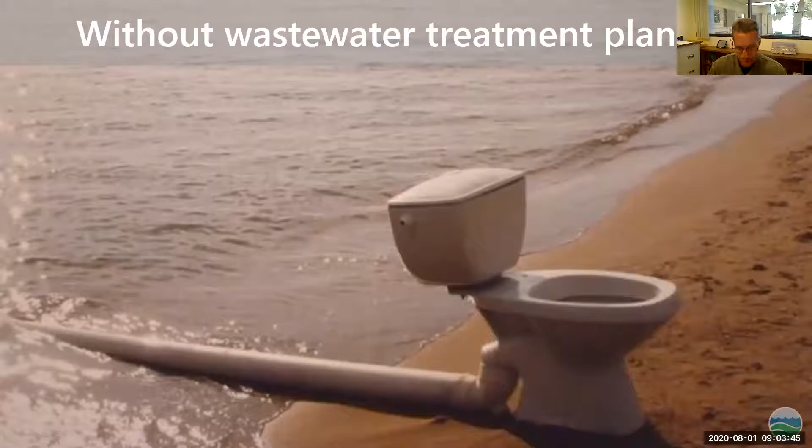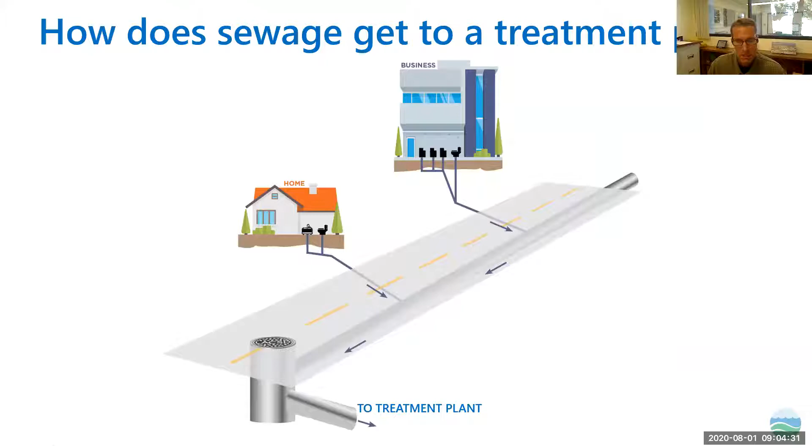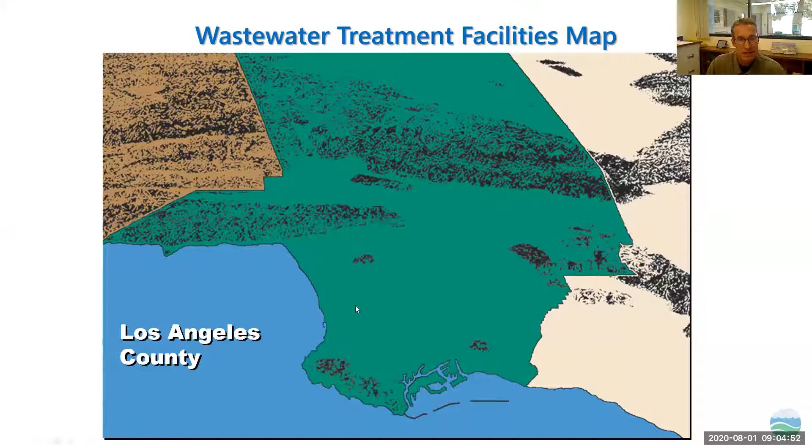This schematic shows the county - first we'll look at the City of LA system. Their Hyperion plant is equivalent in size to our Joint Water Pollution Control Plant, and you can see the outfall that goes out into the Santa Monica Bay. They also have three other water reclamation plants in their system.

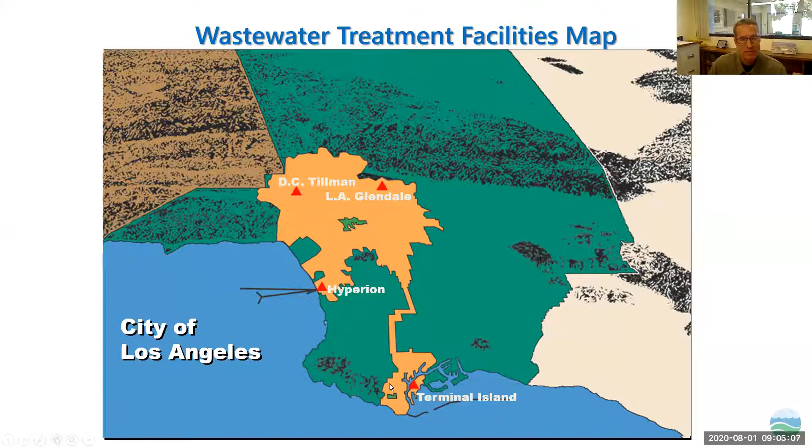But I'm going to talk about our system. You can see again the plants up in the high desert, Palmdale and Lancaster - they serve about 175,000 residents each, and their plants are treating about 12 million gallons per day. Over in the Santa Clarita Valley, you have Valencia and Saugus, serving another 250,000 people, with total flow for these plants about 20 million gallons per day.

I'm mainly going to talk about the joint outfall system here. It's a gravity system for the most part. As I said, we manage the large trunk sewers here, 1,400 miles, and we've got about 50 pump stations. That's these purple dots you can see. So it's a gravity system for flow, but anytime we get to a low point and have to pump it over a hill, that's where we have a pump station.

The other thing that's unique about this system is all the solids from these upstream plants get put back into the sewer downstream of the plant. So down here at the Joint Water Pollution Control Plant is where we're actually managing the solids for the whole system. So these upstream plants, we pretty much cherry pick the residential cleaner wastewater without any refineries or industrial dischargers.

And then we're able to reclaim that water through the process. We use primary treatment for a physical settling process, secondary treatment for a biological removal process, and then finally sand filters up there. And then the water can be reused for golf courses, parks, groundwater recharge, and things like that. The total flow for this joint outfall system is about 400 MGD, 400 million gallons a day.

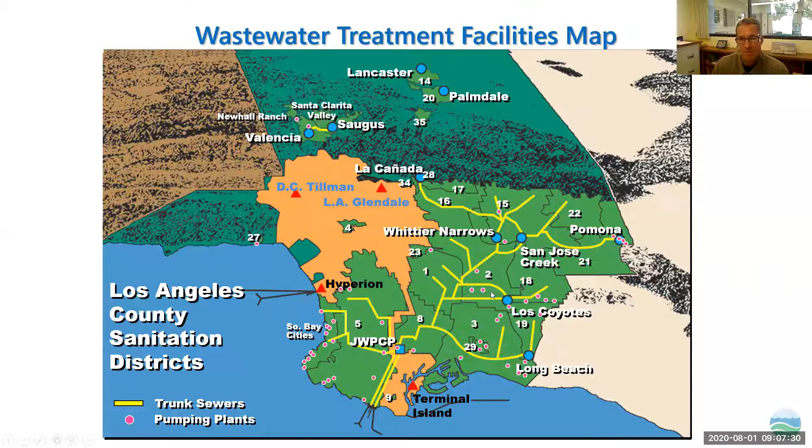As I said, the joint plant here handles the solids for the entire system. We also have an extensive industrial waste pretreatment program where we make sure industries take out heavy metals and any other toxic compounds or volatile organic compounds that might cause problems in our treatment process. Those are required of the industries to do the pretreatment before they discharge to our sewers.

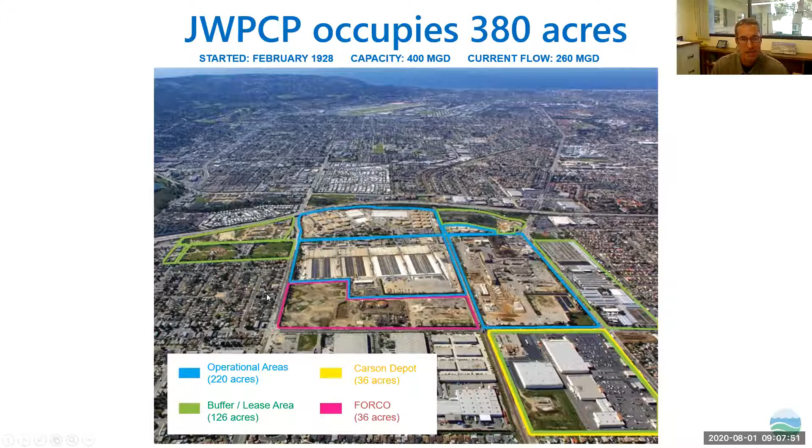So as I said earlier, the plant's been around since 1928, as you can see here. Capacity is 400 million gallons per day, and our flow is about 260. The operational area is about the blue area here, about 220 acres, and then we have another 160 acres of buffer property.

As far as the plant itself, this is our administration office where you come in and see us. You can see the roads and how to get here. We've got 4 main areas of the plant. The primary treatment is on the west side of Figueroa Street, and then also the digesters - those are the large circular tanks here.

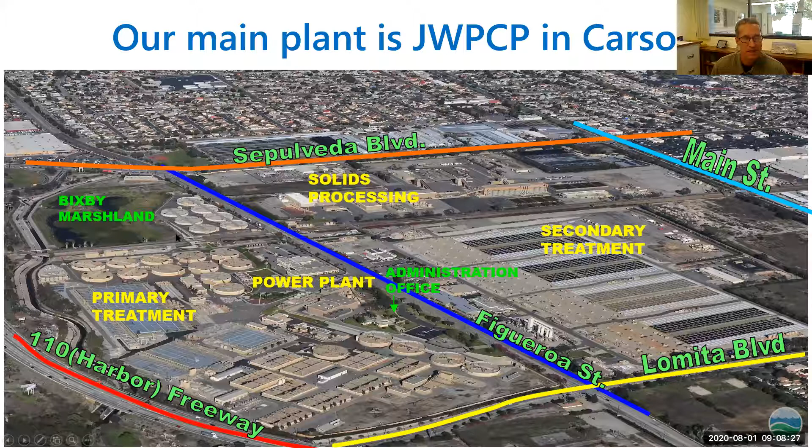Secondary treatment is on this side of the street, and solids processing is north of the railroad tracks. And then as Genesis mentioned earlier, we also have a little gem here, the Bixby Marshland, and Wendy will be talking about that after I finish talking about the plant.

These primary settling tanks, we're just duplicating nature, creating a large spot or a wide spot in the river, I guess you could call it, where we slow the water down from 3 feet per second to 3 feet per minute, and settle out about 75% of the solids.

From there, it goes to a secondary treatment process, and this is a biological process where we take out what we call dissolved organic material. The way you could think of that is like if you have a clear cup of water, and you dissolve some sugar in it - that's organic material and food. But once you pour that sugar in and dissolve it, when you look at that water, it's still clear and you can't see that food in there.

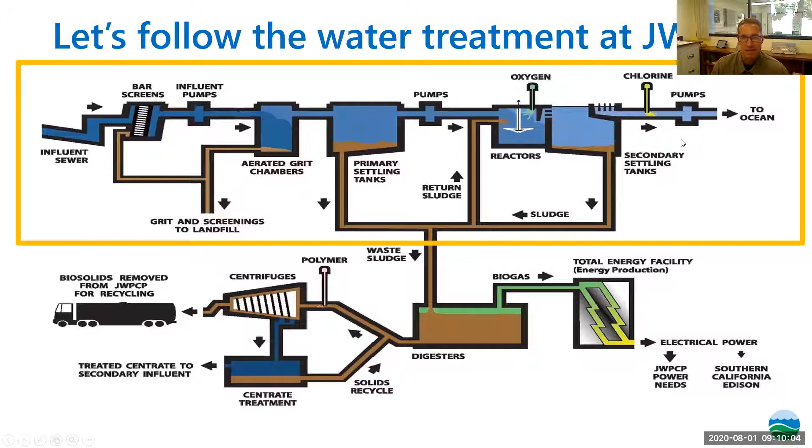And it's the same way with the wastewater. We've got a lot of dissolved organic material you can't see in there, but the bacteria love it - it's food. That's what this biological process does, and it's called activated sludge. So we use these covered reactors and then clarifiers, and the bacteria, the microorganisms, settle out, and then we return them around to the front of the reactors and keep recycling that activated sludge. From there, we go to disinfection, and then it can either pump or gravity flow out to the ocean.

So the first step is our preliminary treatment, where we have 3 main sewers coming into the plant, one for each of these 3 bar screens. You see 3 here with one sewer, 3 in the middle with another sewer, and then 3 on the right side with another sewer.

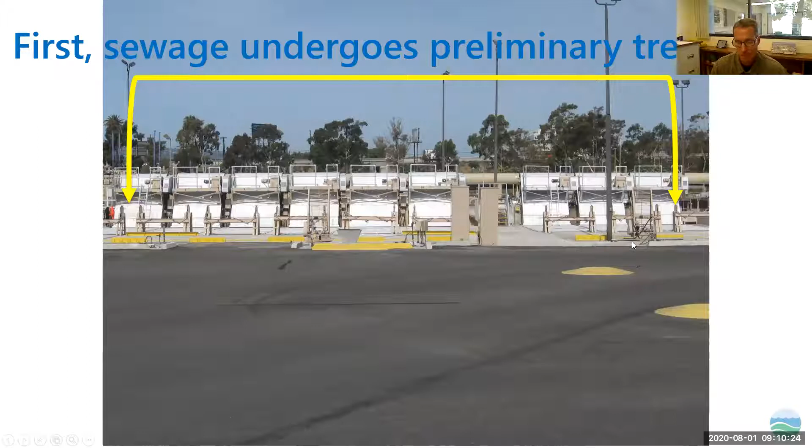These screens have about 1 inch of space between the bars. This takes out any large material that gets into the sewer that we don't want going downstream, anything that could damage downstream equipment. Basically, if you picture anything that could fit through a manhole lid, we've pretty much seen it here - rags, wood, large debris like mattresses.

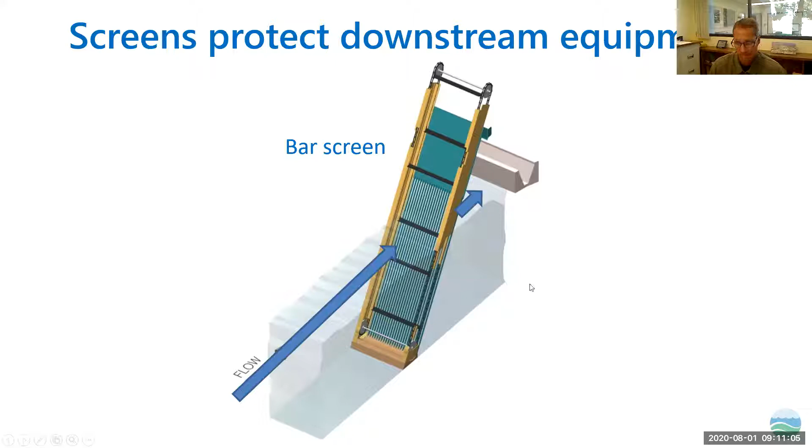There was even one year where we had a sewer collapse right under a nursery, and they had a sinkhole. Right in the middle of a rainstorm, a bunch of those 5-gallon and 15-gallon pails of plants fell into the sewer and flowed down, getting caught up on our rakes, and the operators were pulling those out.

So this is what these rakes look like. Here's a clean one after we did some maintenance on it, and this is what it looks like when it's been in service. Probably the biggest thing we take out is the rags, the disposable wipes. You can see the disposable wipes don't break up like toilet paper, so please don't flush the wipes, even if the box says flushable.

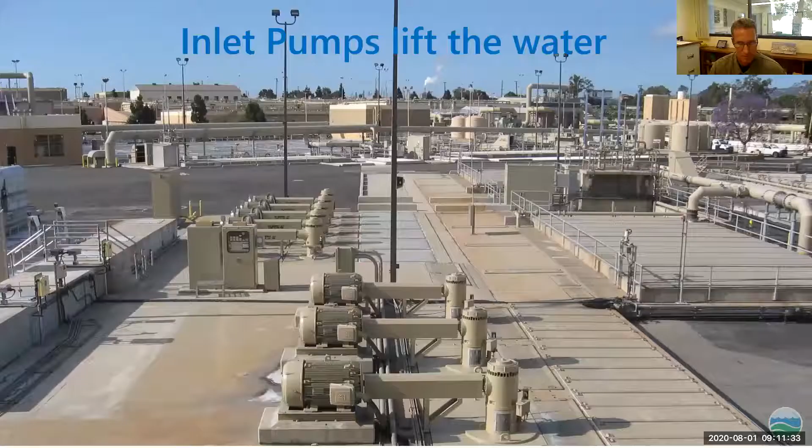Over here, you can see the screens on the left side. The water flows through, and since it's a gravity system, gravity flows to here. Underneath these gearboxes, we have vertical turbine pumps that lift the water into these channels. From these channels, it then gravity flows through primary treatment.

Before it gets into those primary sedimentation tanks, we have grit chambers here. The purpose of the grit chambers is to remove grit, sand, rocks, and other heavier inorganic material. We add air here to try and keep the lighter organic material in suspension.

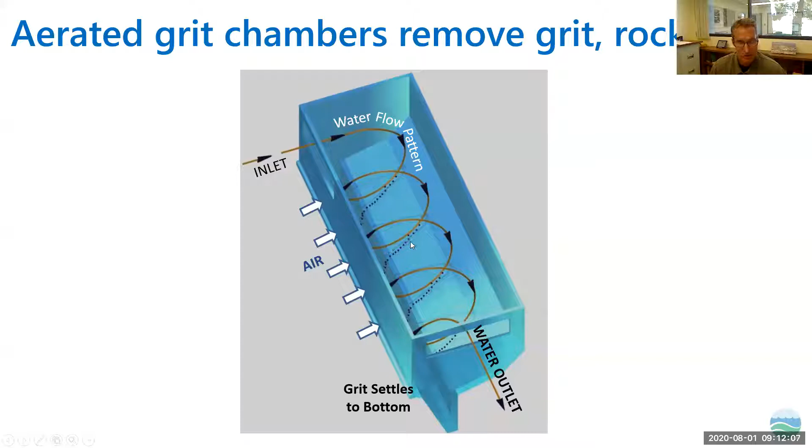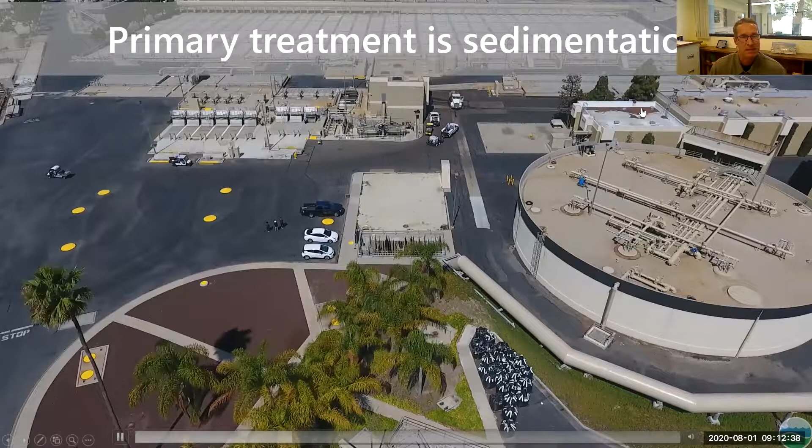So we head in here, you can see the cooling towers from the power plant on the left, and the digestion tank here. This is the inlet works that we just looked at with the bar screens, the inlet pumps, and the grit chambers in these covered tanks over here, our sedimentation, which is the main bulk of our primary treatment process.

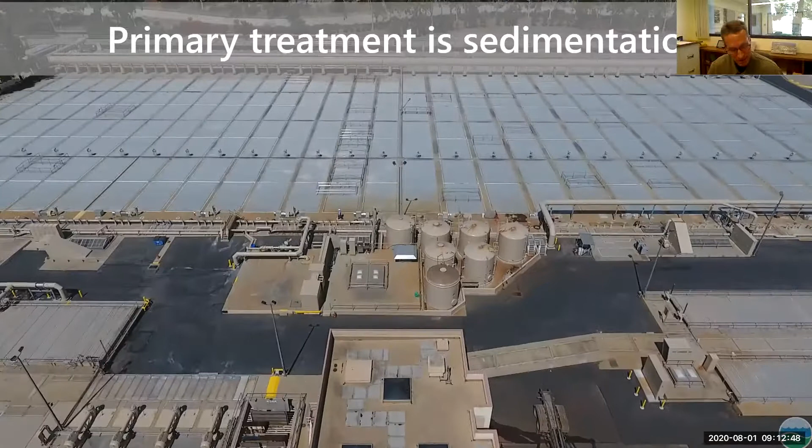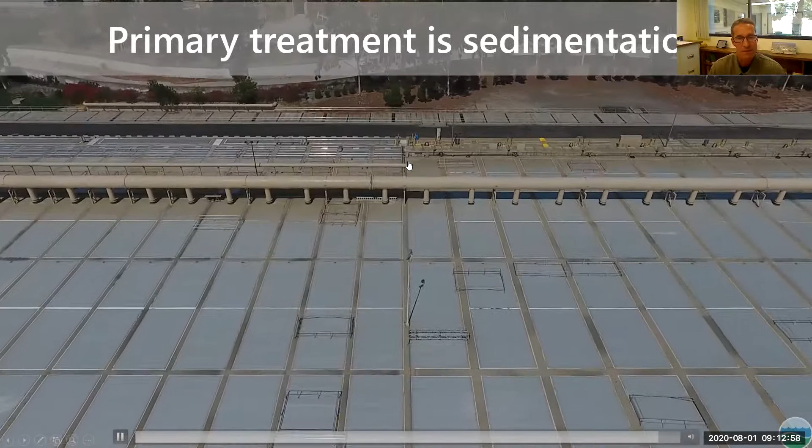As I said, it slows the water down to about 3 feet per minute, settles out about two-thirds to three-quarters of the suspended solids, and it takes about an hour and a half for the water to flow from one end of the tank to the other. From there, we pump this water across the street to secondary treatment.

If we were able to get out and look at a tank, this is what you would see. These tanks are about 10 feet deep, about 300 feet long. The solids that settle out in the bottom, we collect in a hopper and then pump to our digesters for further treatment. The material you see on top here is fats, oils, greases, and other floatable material we call skimmings. This flight moves along and skims that off, and then we also pump that to the digester to be further treated.

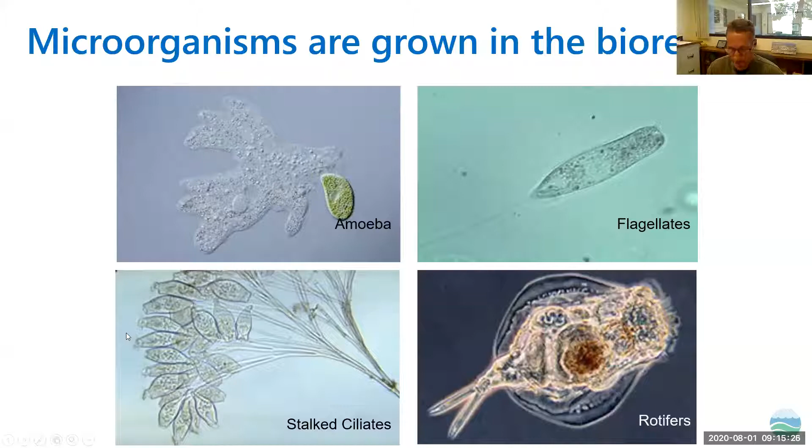This shows you, when I talk about the microorganisms, you can kind of see the various kinds here. These are the ones feeding on that dissolved organic material, or as I described earlier, that sugar.

I've got another video for you here. We're going to fly across the secondary reactor. So the oxygen is piped into the headspace. Underneath these gearboxes, we have surface aerators that do the oxygen transfer. They're just big propeller blades stirring up the surface and transferring the oxygen.

From there, the mixed liquor, the bacteria and water, flow into these tanks. The bacteria settle out and get recirculated back to the front of the plant, and the effluent moves on for further treatment.

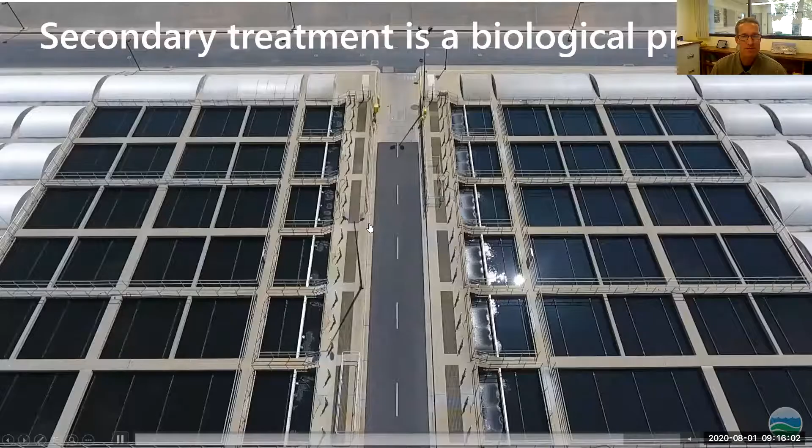Just in case you were wondering what the water looks like, this is the water coming into the plant. We call it the influent. About 3/4 of the solids and about half the dissolved organic material is removed in primary treatment, and then the remaining portion, virtually all of it, is removed in secondary treatment.

Here you can see the clean water we're sending out to the ocean. We disinfect this before it heads out, using 12.5% sodium hypochlorite, or bleach, which is more concentrated than household bleach at about 5% concentration. It's about another 4 hours out to the ocean, and the disinfection takes place there—by the time we reach the ocean, we have virtually no chlorine residual.

We have an 8-foot and a 12-foot tunnel that were installed back in the 30s and 50s. Those have been in continuous service for many years.

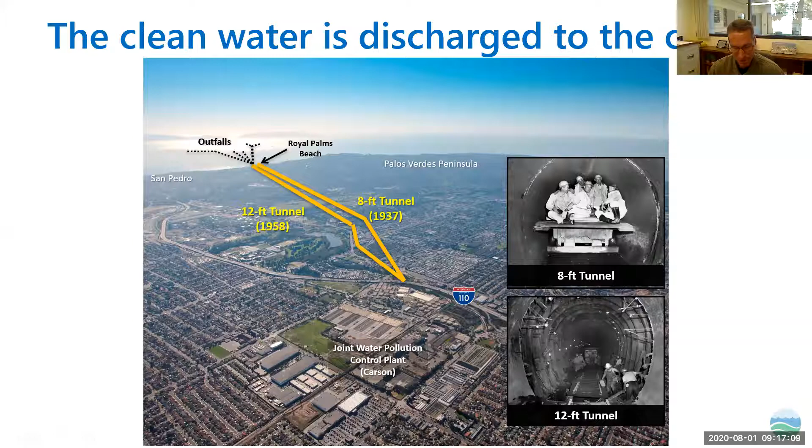Then you can see the outfall here. We have 2 outfalls that go right out to the edge of the continental shelf, a 90-inch and a 120-inch, that are normally in service. We also have 2 older outfalls closer to shore, used just for hydraulic relief during rainstorms and things like that. You can see the diffuser ports on the end here, and our target is 166:1 dilution out there. These are about 1.5 miles offshore, nearly 2 miles, and about 200 feet deep.

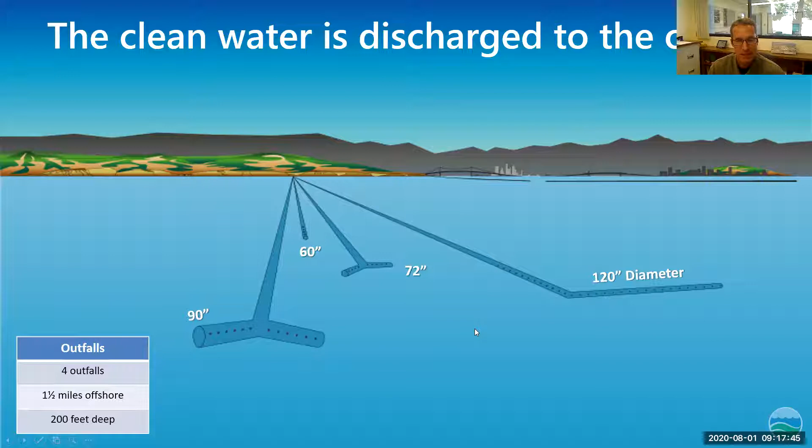We also have a very extensive marine biology ocean monitoring program here. You can see our marine biologists out on the boat. They take all sorts of samples of the water at various depths of the water column, catch fish, look at the fish and other sea animals, and take samples of the sediments to look at the benthic organisms, to make sure we're not having any negative impact on the environment with our discharge.

As I said, the existing tunnels have been in service for many years. So we have this thing called the Clearwater Project, where we looked at the reliability of the system moving into the future. One thing identified was that we had a single point of failure with these tunnels and needed more reliability moving forward. Ultimately, the decision was made to build a new tunnel here.

You can see the serpentine path—we tried to keep it under the public right-of-ways, under the streets, and also routed it so it went perpendicular across any earthquake faults. The design also uses innovative technology perfected out in Japan, where flexible joints are used around the earthquake faults to help with stability in case of an earthquake.

The plan is that once this new tunnel is in service, the 2 existing tunnels would be taken out of service, repaired and refurbished, and then we'd have plenty of sufficient redundancy there.

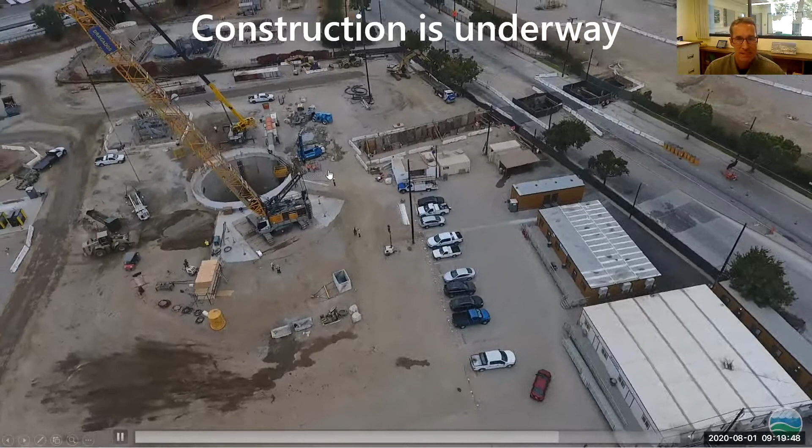And here you can see a tunnel boring machine. These are very sophisticated machines, a couple stories tall. It's currently being built over in Germany and tested, then it'll be disassembled and shipped over to the US and trucked to the site, then lowered down through that access shaft and put together down in the ground, and then we'll tunnel the 6 to 7 miles out to the ocean.

Okay, Genesis, we're at another break point here. Do you have any questions? Yeah, I have actually a few questions that came up.

So, how many people are working at the Carson site and at the sanitation districts as a whole? For the treatment plant itself, we have about 300 people that work on site here, spread around maintenance and construction, mechanics, electrical and instrumentation, laboratory operators, engineering and administrative staff.

Great, and the next question is, how does heavy rain affect the plant capacity? Good question. We do see a significant increase in flow during rain events, and that's due to a couple of reasons. You've got inflow and infiltration through the soil, the soil gets saturated, and if there's any leaking joints in those 1,400 miles of pipes. But what happens a lot of times too is there's street flooding, the storm drain system gets overwhelmed, and when the street public works departments are out trying to drain the streets, they start popping manhole lids on the storm drains, but a lot of times they lift our manhole lids and stormwater flows into our system too. So during a rain event, we'll actually see that 260 MGD average flow could even double or get up around 550, 600 MGD at peak rainfall infiltration events, and have an average daily flow of over 400 MGD, which is right around our plant capacity.

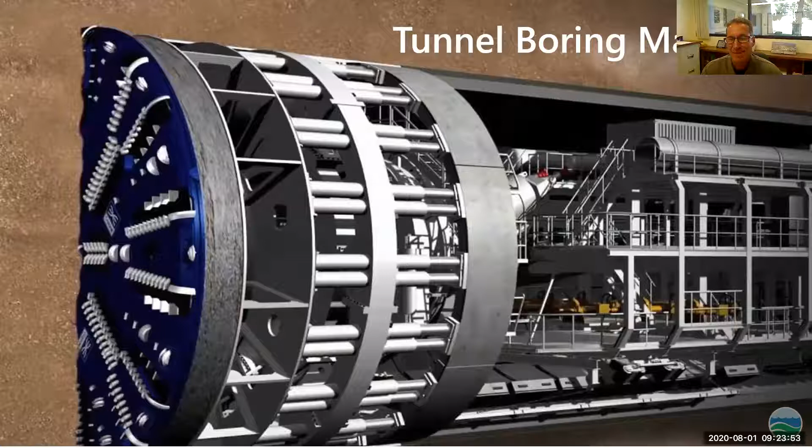What the question refers to is, when we put oxygen in underneath the headspace in that covered reactor, those bacteria, when they break down the organic material, one of the byproducts is carbon dioxide. Just like us, we're aerobic organisms. When we breathe, we breathe out carbon dioxide. It's the same way with the microorganisms. They give off carbon dioxide that causes the water to become slightly acidic. The pH drops from 7, which is neutral, down to about 6.3, 6.4.

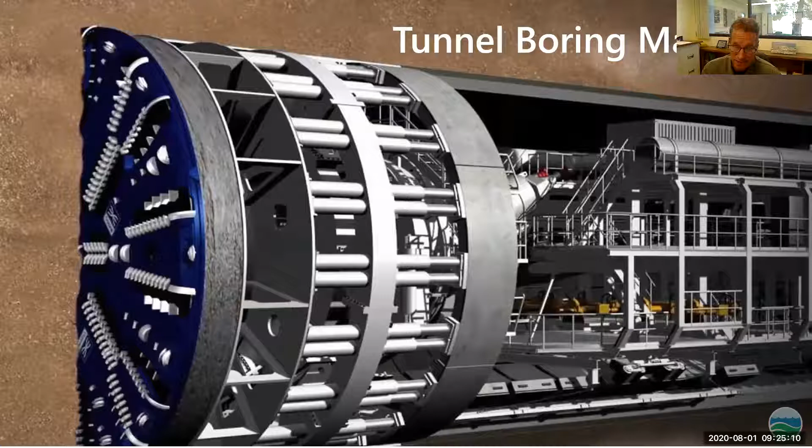So the reason we have this stripper to strip off that CO2 is because with the low pH, if we reuse that water, it's very corrosive. So in the 4th stage of our biological reactors, we pipe air in, which is 21% oxygen, and it has virtually no CO2 in it. So the CO2 that's in solution, concentrated, wants to become in equilibrium with the air that's blowing across at 21% oxygen. So it basically causes the CO2 to come out of solution into the ambient air that we're blowing through the 4th stage there. So it's called the stripper, that's where the name comes from, CO2 stripper for the 4th stage.

Is it okay if I continue on, or did you have another one come in? Just one more, about the tunneling, well, it's a few actually in one. When will the tunneling start? Will residents be able to hear it, and how long will it last?

The tunnel boring machine will be delivered and installed in early 2021, and then they'll tunnel out to the White Point area, where there are some connections to make and modifications to our manifold structure. That work will take about 3 years to complete.

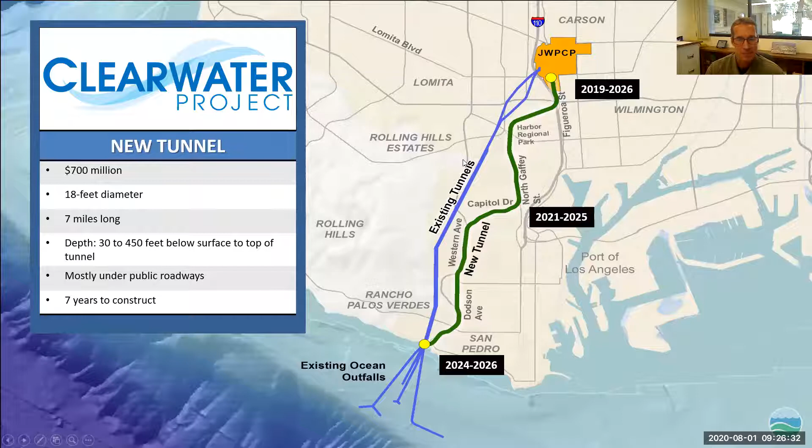Along Figueroa Street, on the right side of your screen which you can't see here, if you drive by you'll see a large noise wall that's a barrier for the work taking place. That work already started last year, so hopefully impacts on the local community will be minimized.

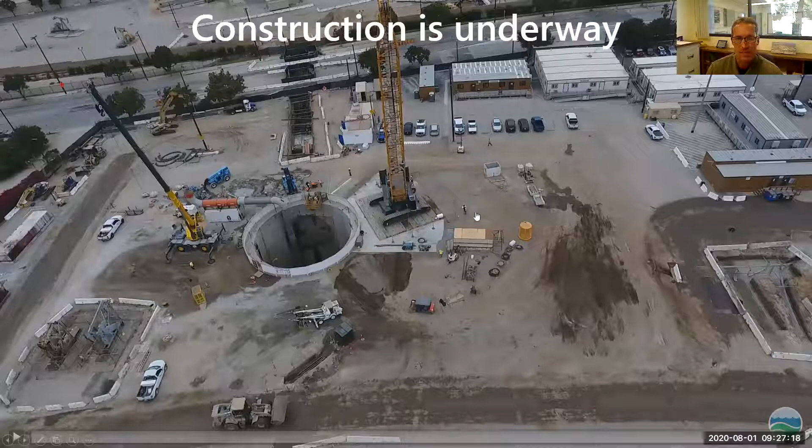There's also a number out there. I don't have it on my presentation, but whoever asked that question, we can get you the number to call with any concerns or issues, and we can put you in touch with the field engineer on the job for more detailed answers.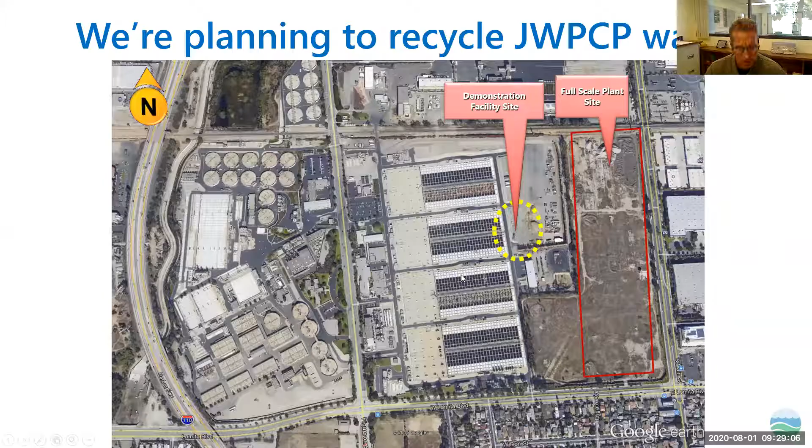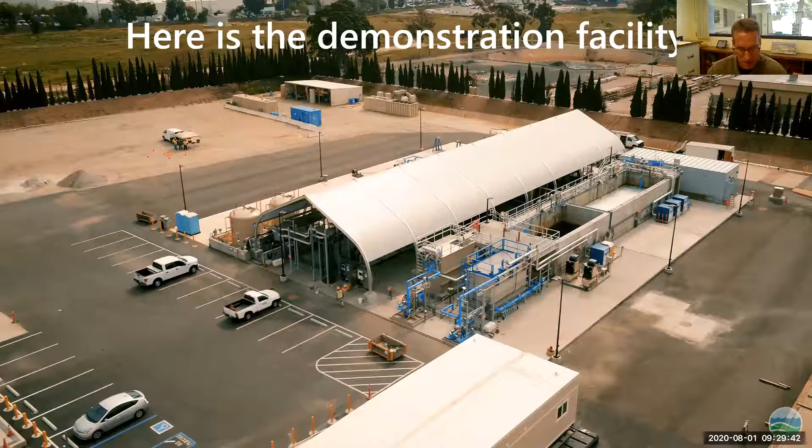There's a finite amount of water on the planet, especially in Southern California, so it makes sense to recycle and reuse as much as we can. We can probably reuse up to 150 million gallons per day from our plant.

Where would this water go? There are various sources or locations - the saltwater barrier injection wells in the South Bay and in the Long Beach area, and spreading basins in Orange County, Rio Hondo, and Santa Fe, where the water can be spread and percolate down into the groundwater for drinking water.

The water produced from our facility would be clean enough that it could actually go to the Diemer plant or the Weymouth plant, the MWD's drinking water plants, directly on the front end to be treated and then used as drinking water.

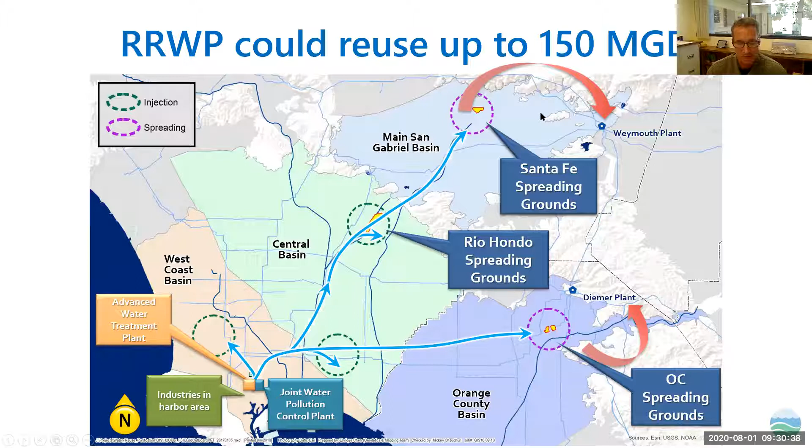How often do you check to see if the under-ocean pipes are leaking?

That's a great question. We actually check throughout the year. Once a year we have a submersible vehicle called an ROV, remote operated vehicle, that marine biologists use to go down with this little sub with a camera, and they'll go along the route of the outfalls checking for leaks or abnormalities, or if anything was damaged during a storm event. All our marine biologists are also trained divers, so they dive down to the more shallow sections of the outfall to do inspections and inspect the sea life, looking for any abnormalities or anything out of the ordinary.

So our next question is, why does the clean water flow into the ocean? Why not into the rivers?

Well, for the water reclamation plants upstream, they actually do flow into the rivers and eventually make it out to the ocean. Where we're at, our Wilmington drain, the storm channel right next to us, flows into Machado Lake. Because of the ammonia and salt concentration in our effluent, that wouldn't be good for the lake, so we go out to the ocean, and there's already a lot of ammonia and salt in the ocean. So what we're adding is kind of a drop in the bucket, and there's no negative impact from us going to the ocean.

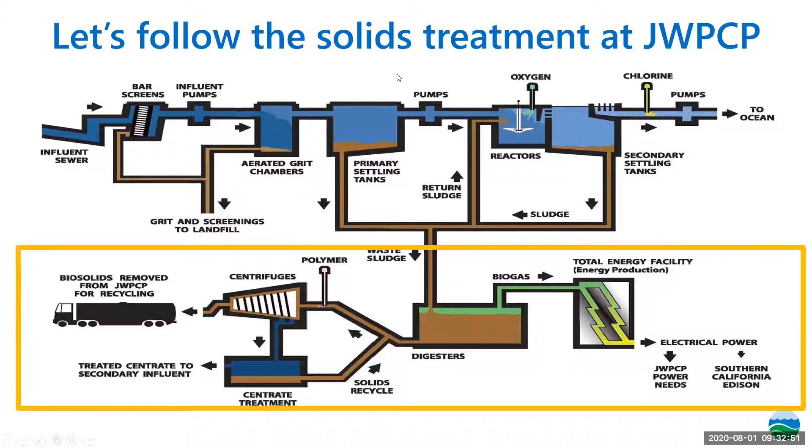Now the majority of questions, everyone wants to know about the solids. What happens to the solids? So Steve, I'll let you continue on to that next chapter. That's a great segue here. Yeah, it's perfect, I saved it for last.

So the first part we went through, we looked at the blue portion here through the water of the plant. Now we're going to look at the solids treatment. We've got solids that settle out in primary treatment and get pumped to digesters, and those microorganisms, just like us when we eat, put on weight. Same thing with these microorganisms - they're feeding on all that dissolved organic material. So we recycle a constant quantity, but any growth we waste out, and we call it waste activated sludge.

And we send that to the digesters. These are anaerobic digesters, the same bacteria that's in your stomach and your gut. We use these digesters - they give off gas, and the gas we collect and run through a power plant. The digested sludge then goes to centrifuges for dewatering, and then is hauled off site for recycling. I will go through each of these steps on the following slides.

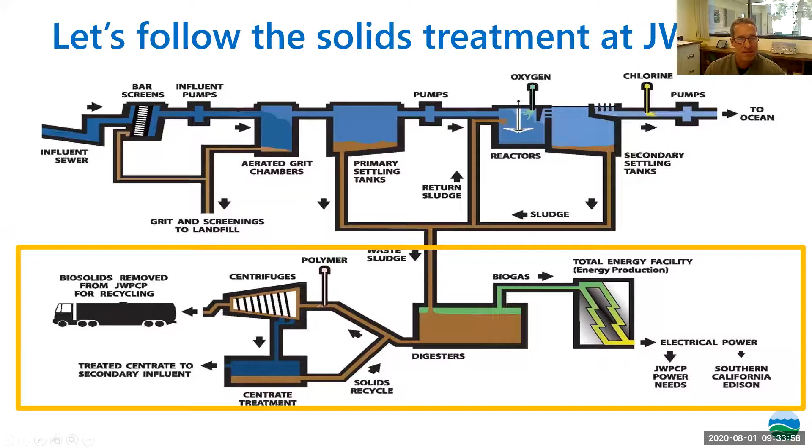So as I mentioned, anaerobic digestion is the centerpiece of this solids treatment. These are huge tanks, 3.5 million gallon tanks. There's about 10 feet above ground, and another 30 or 40 feet below ground. We've got 24 of these, so think of that as 24 tummies that we have on site treating these solids. About 50% of the solids are broken down by the bacteria in these digesters.

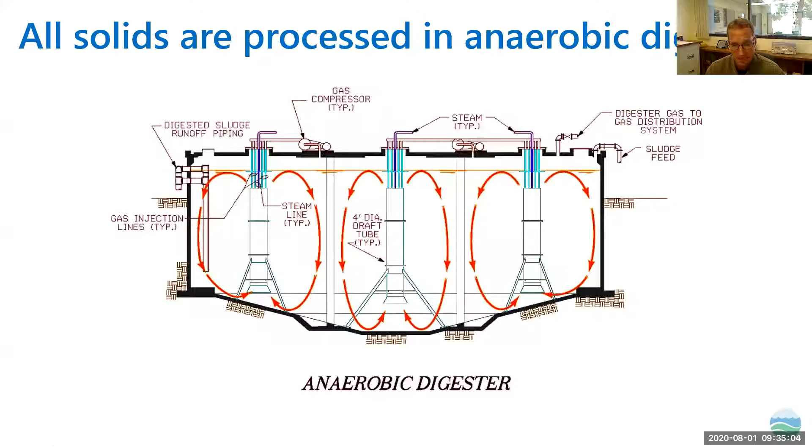We're able to look at a cross section - this is what you would see. The gas that comes off in the headspace is pulled off with these compressors, and then these lances blow the gas back down to about here in these draft tubes. There's no moving parts in there - it's all static mixing, so the gas bubbles come up and create a current and create the mixing. The advantage of digestion is it kills pathogens, makes the solids easier to dewater, and produces a gas we can beneficially reuse.

If we were able to take you inside one, this is what it would look like. Just to give you a feel for the size, if you see this board over here, this is about an 8-foot long board, so a 6-foot person would be about that tall there. As I said, these are 50 feet deep and 125-foot diameter, 3.5 million gallons. We have so many because we need at least a 15-day minimum detention time to properly treat the solids.

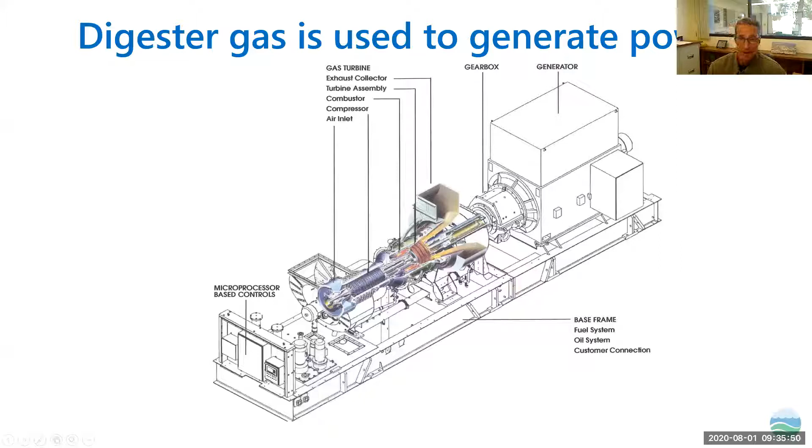The digester gas we use to produce power - we're energy self-sufficient at this plant. We use gas turbine technology, like a jet engine. We use digester gas as the fuel. It goes through a combustor section, through a turbine, and that turbine spins a gearbox connected to a generator and produces the power. This is what it would look like if we could take you in to see it. We've got 3 gas turbines producing about 9.5 megawatts each, and we save $15 million a year by taking that gas and recycling it to produce our own power.

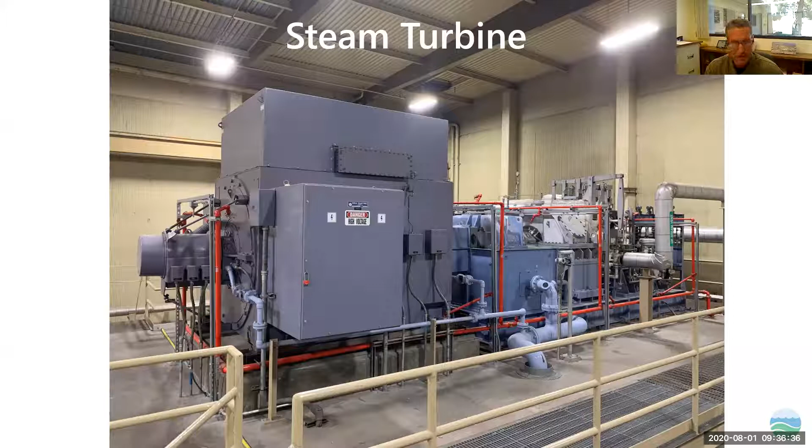Another innovative thing we do here at the plant is the hot exhaust. Rather than just coming out this stack, we have these heat exchangers, and we run the hot exhaust through that. The heat exchangers are filled with water, and that boils off the water to produce steam. That steam is then collected and run through a steam turbine to produce another 4 or 5 megawatts of power. That's why our plant is commonly called the combined cycle power plant, because there's a gas cycle and a steam cycle.

We also, as I mentioned, the digesters use the same bacteria as in our stomach, and the wastewater comes in at 75, 80 degrees. These digesters need to be heated up to 96 degrees, so we use boilers to produce low pressure steam. We use the digester gas as fuel to produce the steam, and that steam is piped to the digesters to heat them.

Another thing we're doing at this plant, which we started up 3 or 4 years ago, is getting more energy by taking in food waste into our anaerobic digesters. There are new state laws that say you have to remove food waste from landfills, because it's a resource with a lot of energy value.

So we had a demonstration project with Waste Management where they took food waste, pre-processed it off-site, sent it to our digesters, and produced digester gas. As I said, we can use that gas to make steam and electricity.

Biomethane is when you take the gas and clean it up to natural gas pipeline quality and re-inject it in the pipeline. We're not doing that here, but some other plants in the country are. The digester gas has about 65% methane, and you have to concentrate it to put it in the pipeline. We actually have a vehicle fueling facility on site for CNG, which doesn't have to be cleaned quite as much as pipeline quality, so we have a project with a cleanup skid to take our digester gas and use it for vehicle fuel.

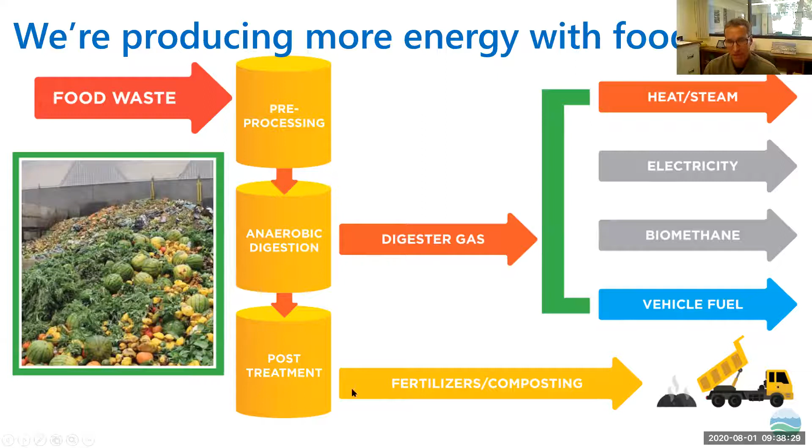About 80% of the solids from the food waste are converted into gas. The other 20% are hauled off site for composting and recycled as fertilizer on farms.

This shows you what the food waste looks like. Oh, I forgot to mention, a lot of the residential food waste we already get comes in through garbage disposals and through the sewers to us. So when we talk about a food waste program, we're mainly talking about commercial food processors, grocery stores with a lot of spoiled food, restaurants, and grease traps from restaurants, things like that.

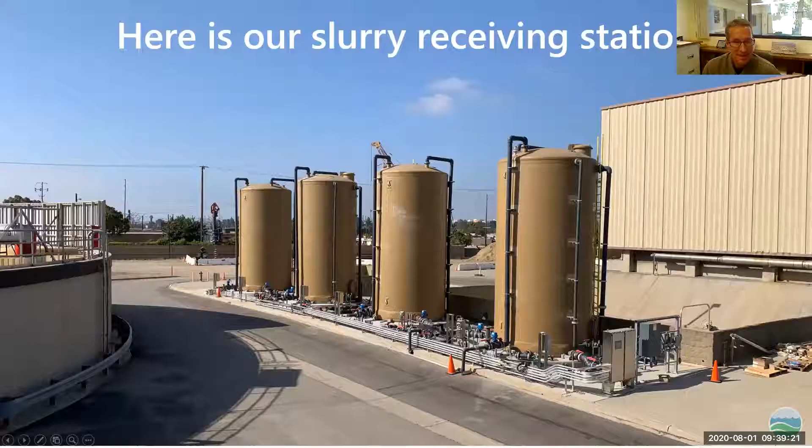So you bring that in, and it's got a lot of contaminants in it. You can see utensils and metal that have to be screened out. They use screens to take out the plastics, broken glass, and any other debris. Then you're left with this food waste smoothie, which we haul in tanker trucks, offload into these tanks, and then pump across the street to the digester.

We also take some food waste at the front of the plant that flows through the treatment process and gets pumped to the digesters through the primary treatment sludge.

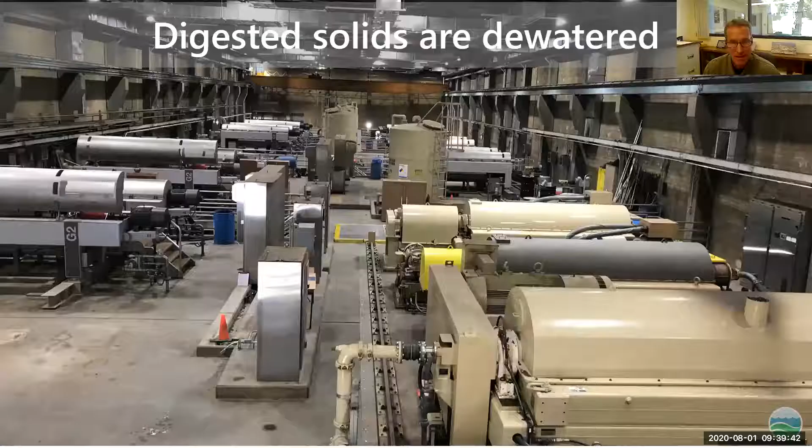Okay, I guess that's another break, Genesis. Any more questions before we move more into solids here? Could you raise your voice just a little bit? Oh sure, I think some people are having trouble hearing you. Okay.

So the next question is, how often do you do maintenance or overhaul on this? Well, as far as the plant itself, we've got quite a few people who work here - technicians, maintenance, construction, and mechanics - and we have a very extensive preventive maintenance program, which is basically what they do day in and day out on the various pieces of equipment and electrical switchgear, to make sure everything keeps running, because we run 24 hours a day, 7 days a week, so we can never shut down. Part of what we do is design in enough redundancy so we can take pieces of equipment out of service for maintenance without impacting the treatment process at all.

So our next question is, what do you do with all the plastics that come in with the food waste? Well, as I mentioned, in the pre-processing we try to take out as much plastic as possible, but some does get by the screens. In those digesters, we actually have to take them out of service about every 8 or 9 years for cleaning. We have 24 digesters, so there's always one out of service being cleaned at any given time. That's to clean out any grit, sand, or rocks that settle at the bottom, as well as any plastic or floatable material that builds up in a mat on top of the digester. We clean all that out about every 8 or 9 years.

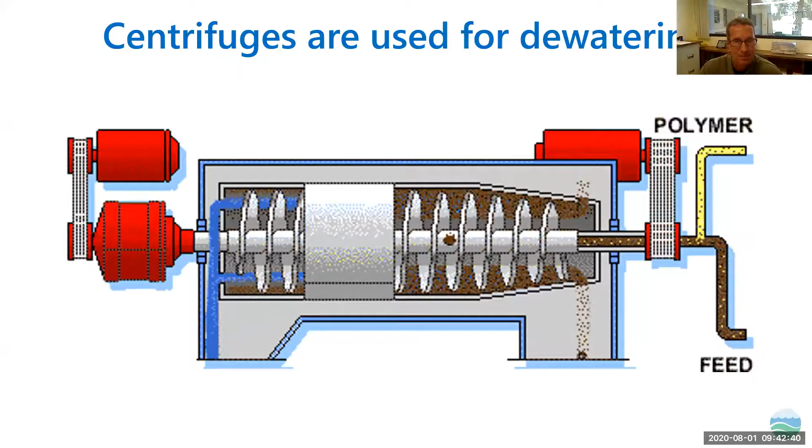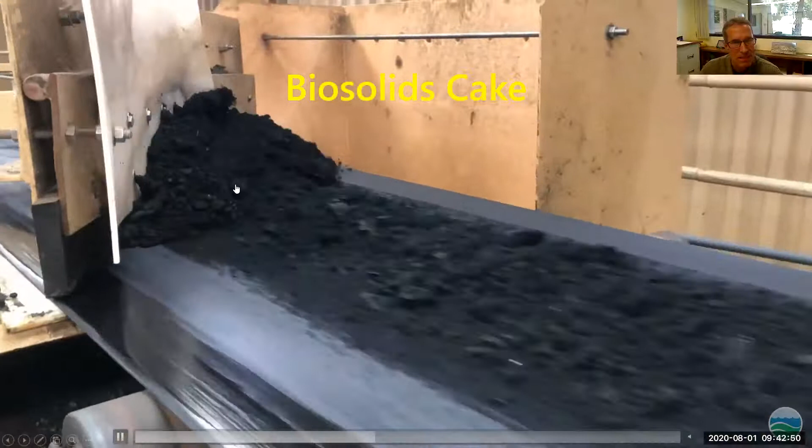Here you can see the solids. We use conveyor belts to move the material around. It's called cake because, as you can see, it looks like moist chocolate cake. Surprisingly, even though this looks pretty dry, it's about 70% water still, so there's a lot of moisture left in that.

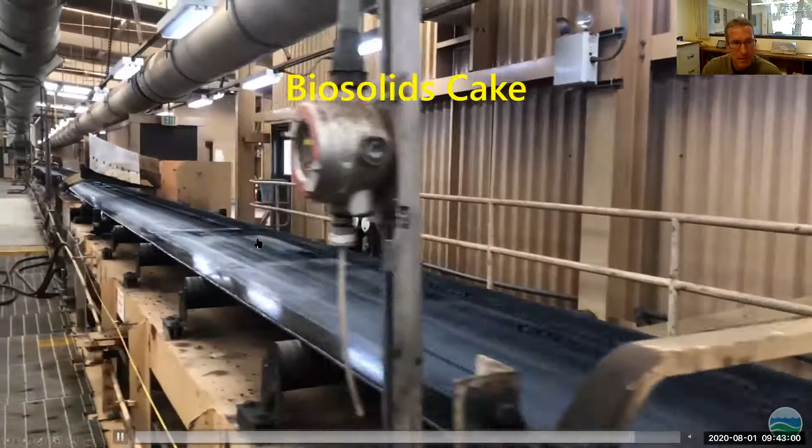These inclined sections here, this is where the conveyor belt went up. That video we took was right on top of the silos there. Those are storage silos where we can store the biosolids if we have problems hauling things offsite. If due to weather or earthquake or something a freeway is closed and we can't get to a reuse site, we do have some storage capacity on site.

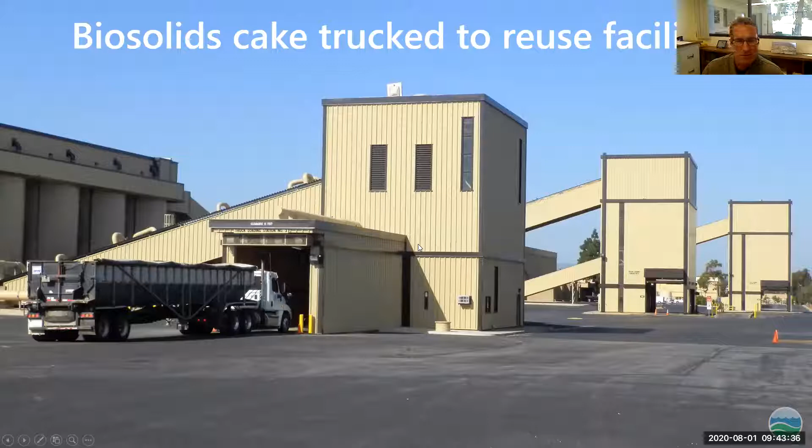From the silos, there's a conveyor belt that takes it up to the truck loading station, and then we load the trucks. We're producing about 1,200 wet tons per day of material, so about 50 trucks a day hauling material out of this site.

Denali, we haul some of the biosolids out to Arizona for land application out there. Then Tulare Lake Compost and Inland Empire are owned by the districts. Inland Empire Composting Facility is a joint venture between Inland Empire Utilities Agency and the districts, and that's owned and operated by us. Tulare Lake Compost is fully owned by the district.

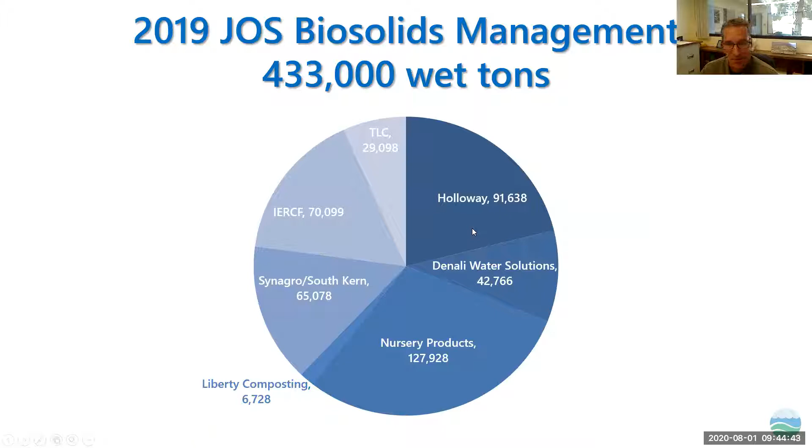Here you can see the diversification. We try to spread things out, so if we have a problem at any one location for whatever reason, we don't have all our eggs in one basket. We have to, because obviously 50 trucks a day have to go somewhere.

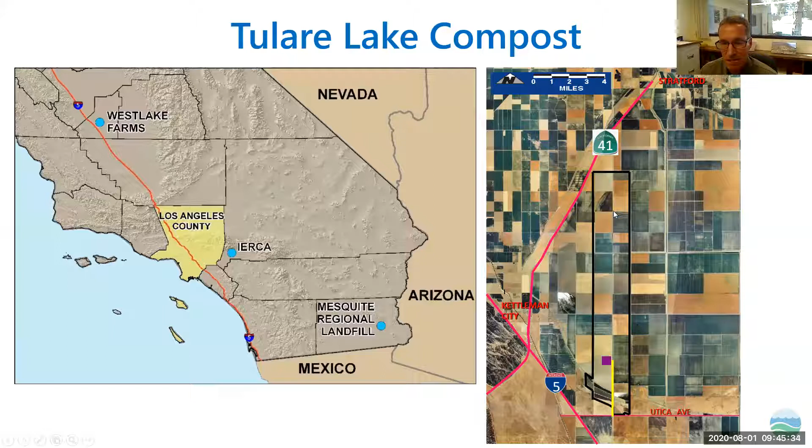You can see here on the right side, this purple box is where the compost facility is, and they compost our biosolids with the wood waste from the Central Valley. The finished compost is then land applied on this farm, Westlake Farms, and that's the black bounded area there.

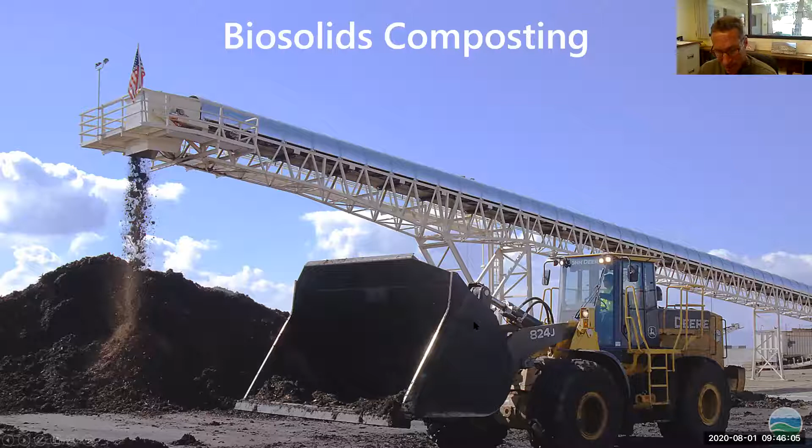For the biosolids composting, here's another example of what a compost site looks like. This is one of the Synagro sites. Again, they're using wood waste from the farms and composting it with the biosolids. The advantage of using that wood waste is instead of burning and creating smoke and an air quality hazard, you're able to use the compost to break it down and then reuse that material on the farms as fertilizer.

Okay, so that was solids processing. Any questions, Genesis, that have come in?

Yeah, so one, you've got an awesome voice, but could you please raise it up a little bit? Some people can't hear you. Chime in if I'm fading off. Sorry about that. I just got that question right now.

So most of our questions right now, everyone's very interested because this is all sounding very smelly. So they want to know, how do you do it so that it doesn't smell? How do you keep the solid waste from smelling? That's our main question. Well, let me go through the odor control here, and then we can see if they have any further questions or if the questions were answered.

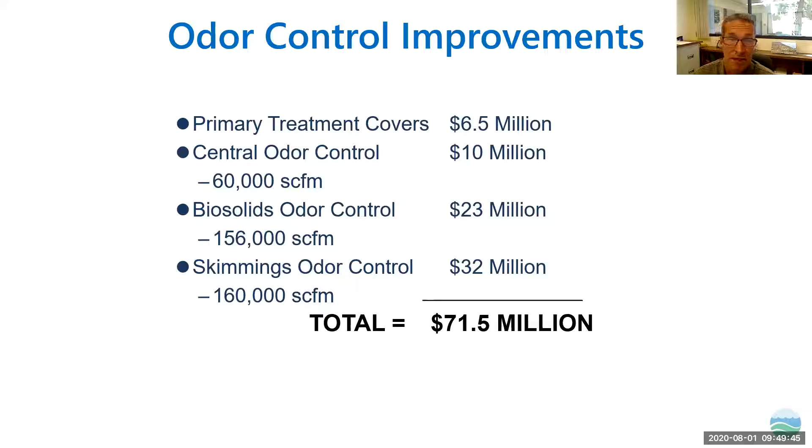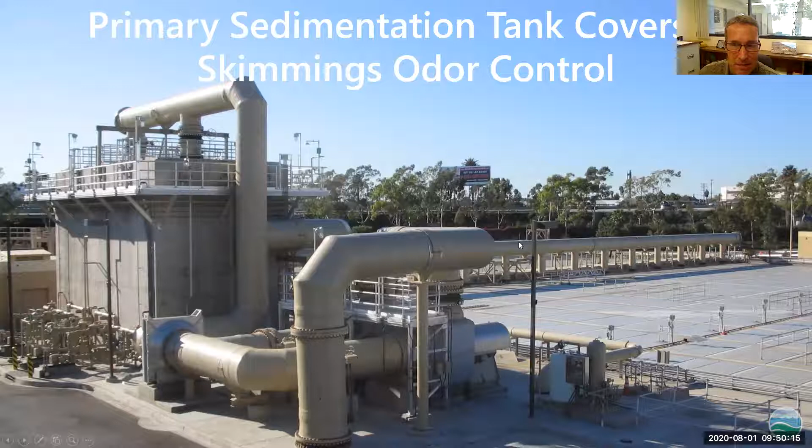So with that said, one of the big projects was to add these flat, gasketed covers. Many years ago, these tanks weren't even covered at all. Now they're covered with these gasketed covers to seal them up, and we have blowers that pull vacuum on the headspace under the covers. As you can see here, there's a connection for each tank - it pulls the foul air up and then the foul air gets pulled over to our odor control station.

There, it's a two-stage process. The first stage is this biotrickling scrubber. These are blowers here, and the foul air gets pulled through the biotrickling scrubber, which is filled with lava rock that we keep moist. There's water continually being recirculated across it, and a biofilm grows - it's a biological process. The bacteria actually feed on the sulfur and oxidize the sulfide in the H2S to sulfate, basically creating sulfuric acid, which is not odorous like the hydrogen sulfide.

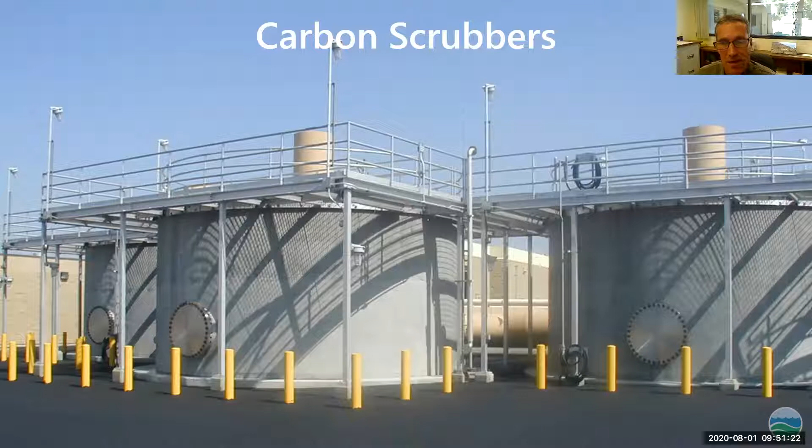Then the second stage of the process is volatile organic compound removal. Because we have some refineries with trace amounts of volatile organic compounds in their pre-treated wastewater, those come out and are in the foul air too. So we use activated carbon in these scrubbers to take out those volatile compounds - benzene, toluene, vinyl chloride, things like that - any trace amounts.

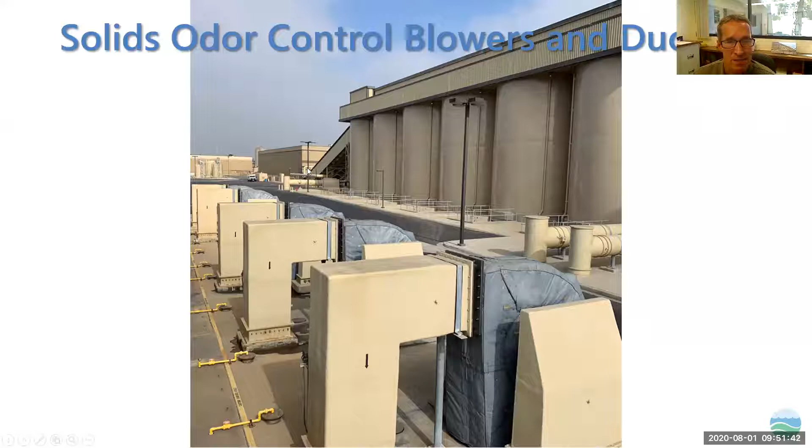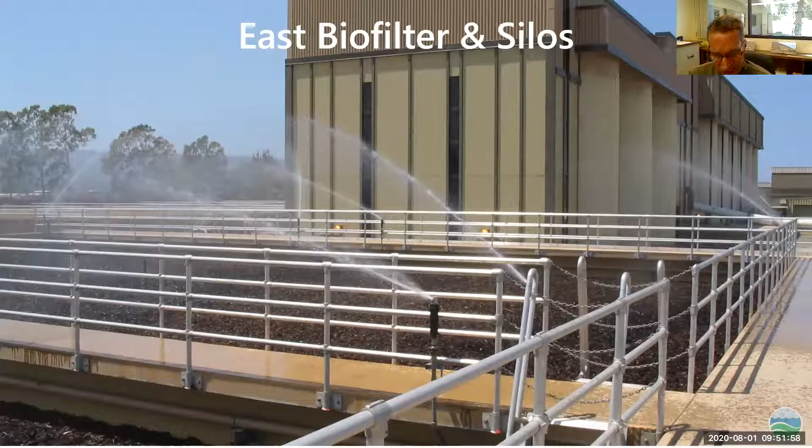Over at solids processing, it's a different type of odor. You can see the blowers over there, with ducting pulling foul air off the silos, and also pulling foul air off of the conveyor belts. It's more of an ammonia-based odor and complex sulfur compounds like dimethyl disulfide, mercaptans, things like that. So we use compost or a wood waste product, and keep it moist so biofilm grows there and neutralizes those types of odors.

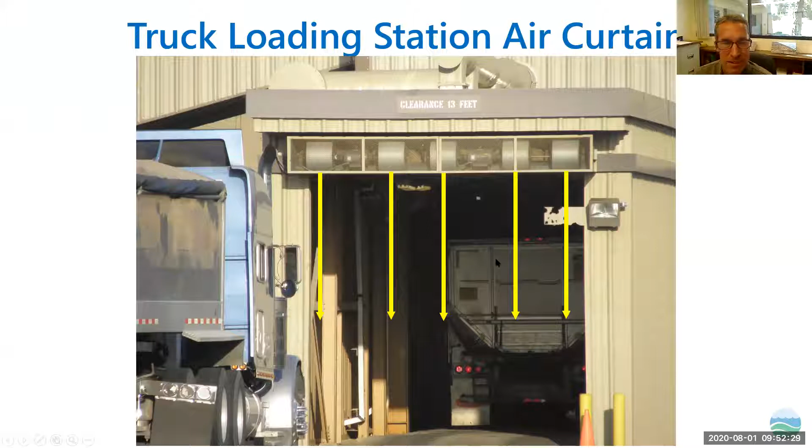One of the other really odorous parts of the process is when we're loading these trucks. As we load the trucks with the biosolids, you can see it getting stirred up - that's when the odors come out. So on the truck loading station, we have these air knives, which create an air curtain to try and keep the odors in during the loading process. But when these trucks pull out and wait at the light right before they get on the freeway, there is potential for odors there too. You could probably smell it.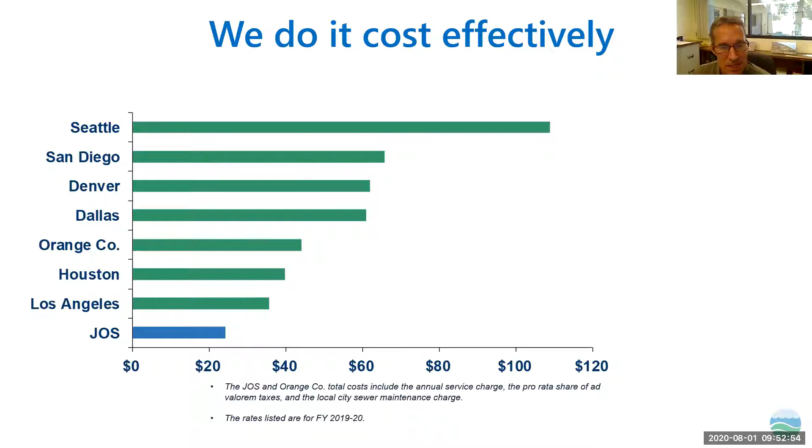The last slide I've got here is related to the cost of operating this plant and the collection system, the sewers, and all the upstream water reclamation plants. You can see it's less than $30 a month, compared to other cities of comparable size, it's one of the most cost-effective agencies in the country.

Okay, so any other questions? Did I answer the odor control questions, Genesis? Yes, you did. Thank you.

Hope you're ready for this because we've got a few questions for you. First, do you have industrial health and safety employees on site? Yes, the district has an environmental health and safety group that oversees all our safety programs, and we have an analyst assigned to our site that we work with.

In many countries, people regularly put toilet tissue in the trash, not the toilets. Would that make a difference if we did that here? The toilet paper isn't a problem, it breaks down and dissolves in the water pretty quickly, and doesn't affect our treatment process at all. It's the disposable wipes made of a different fabric material that don't break down, and that's what causes the problems. Those wipes should be put in the trash, not the sewer.

So where are the digesters that eat the solid waste located? Did you say eat the solid waste? Yeah, what do you mean by eat? I don't know, that's what the question had.

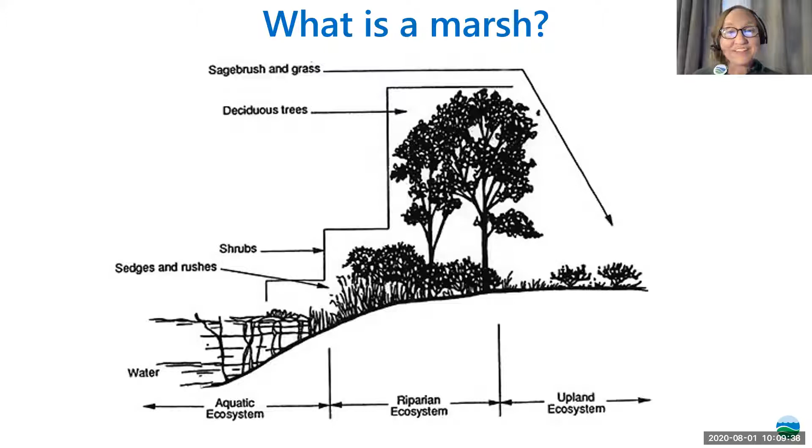So let's take a look, let's get out there. The marshland is very important habitat here in California, and actually throughout the world. It's home in the US to 43% of our federally listed endangered and threatened species. These types of environments provide habitat for birds, amphibians, invertebrates, fish, and a diverse group of plants.

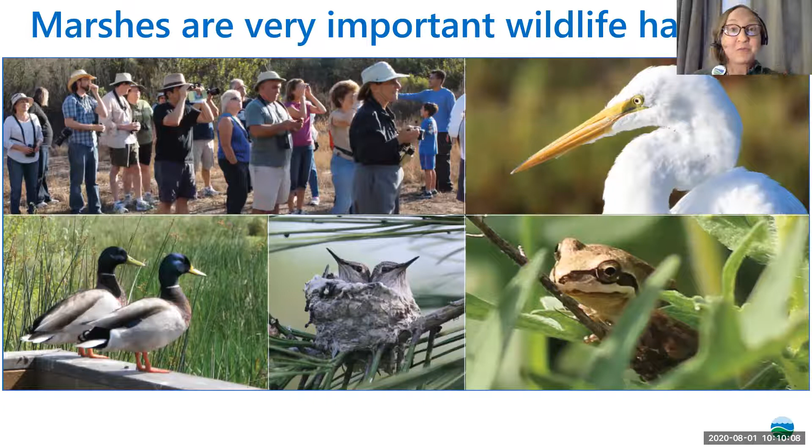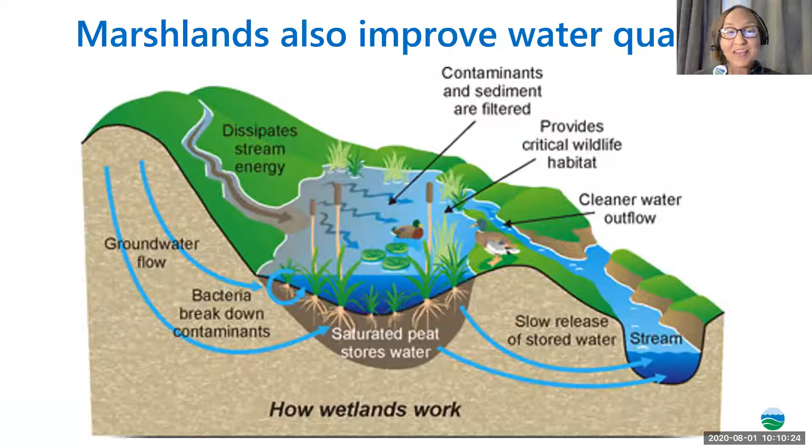They're essential for many migratory and resident birds, but they also have an environmental impact related to water quality. They improve water quality, help prevent flooding, marshlands filter pollutants, they help us recharge our groundwater aquifers, and they sequester greenhouse gases.

As the sanitation districts, you saw those incredible facilities over at our joint plant. We go through an intricate planning process in order to provide for the future needs of Los Angeles County, and as part of that, we saw this opportunity to restore a natural resource.

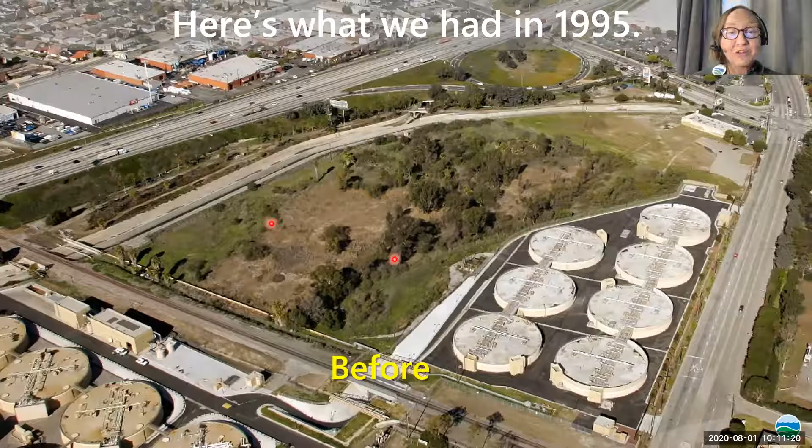In addition, another reason we needed these experts and community involvement was that not only did we need to comply with our environmental impact report and the conditions associated with that, but we also needed to obtain a number of permits.

We needed a permit from our Regional Water Quality Control Board. You heard Steve talk about the more than 20,000 parameters that his plant monitors in response to the NPDES permits. But also on our side, we needed to comply with a Regional Water Quality Control Board permit.

We needed an Army Corps of Engineers permit, and we also needed to get one from the California Department of Fish and Wildlife Services. So, as I mentioned, a lot of thought went into this design.

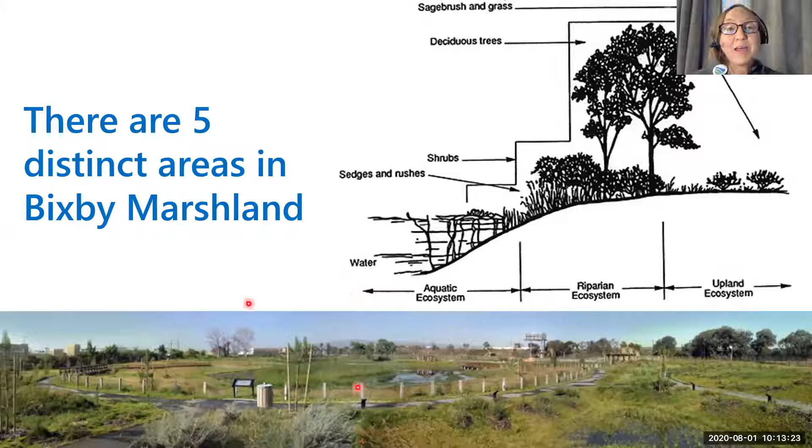So let's go look at all 5 of these areas. You're going to see when you visit our Bixby Marshland, because we can't wait to get everyone back out there again. When you get out there, what you're going to see is that even our parking lot has been designed as one of these ecosystems.

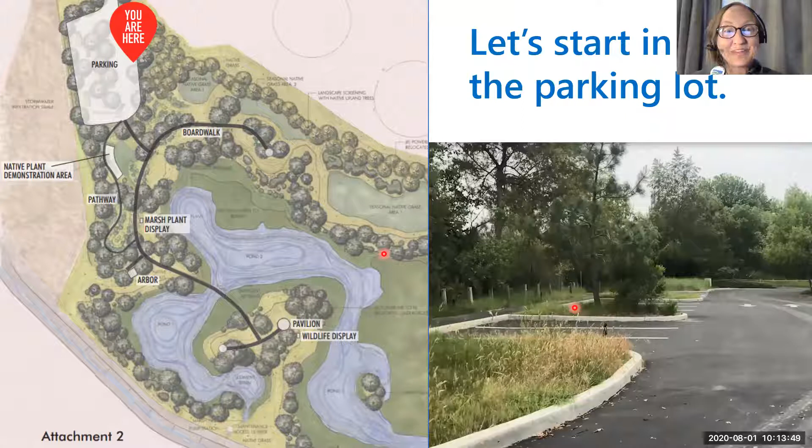Our parking lot is representative of Area 3, which is riparian habitat. Let's take a look. As we continue, oh, I don't want to go that far. I'd like to look at the marshland here. Let's see if I can get my video playing.

As you enter the marshland, you're going to see—yeah, my video did not play, so we'll just continue. But what you'll see is that even from our parking lot, we're able to see these endangered and rare species. This is a yellow-bellied sapsucker, and it was photographed from the parking lot, and it drew a lot of bird watchers to our site.

We also have a lot of ongoing maintenance activities, and part of that helps us keep these 5 zones in place. This was also photographed from our parking lot, and it shows the hummingbirds in Torrey Pines.

Let's go ahead and continue, and we're going to look at our riparian pathway. As we walk towards the education pavilion, you can see our riparian pathway here, and some of the ongoing activities include an annual bird awareness training for nesting birds. This is one of the few places in Los Angeles County where—oh good, this video is going, so this is great.

This way you guys will get a chance to see some of this riparian habitat. So this is on our way to the Education Pavilion, and once again you see the Sanitation District's commitment to recycling. Even our trash bins are made from recycled materials.

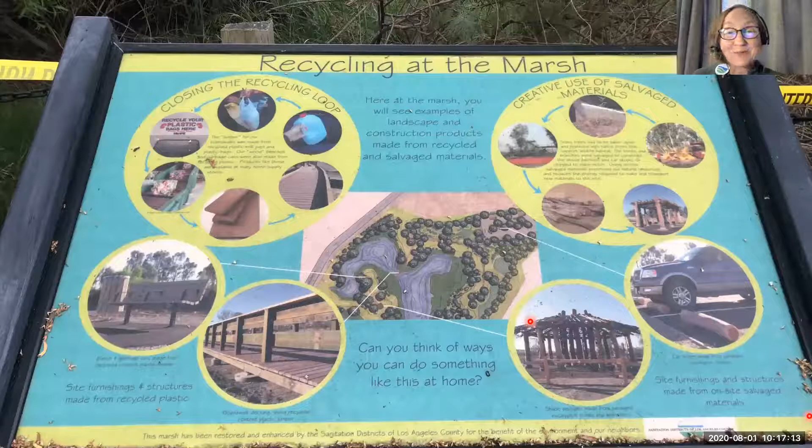This placard shows you the level of commitment to recycling that the sanitation district has; we're committed to converting waste into resources. Here you see a placard that explains how some of the resource recovery facilities have been incorporated into the design of this marshland. I pointed out that our garbage bins are made from recycled plastic, so talk about completing the cycle.

So let's go ahead and walk towards our open water area and towards our education pavilion. And so here you get a chance to look at it close up. Here you see the amount of vegetation that has grown in.

These eucalyptus trees form habitat and a place for the desert grape. Keen observers will also notice that this eucalyptus forms a habitat for the bark beetle. If you look close, you'll see patterns on this wood showing the life cycle of the bark beetle — the larval stage eats the eucalyptus. Here you see the desert grape.

One of the things so exciting about inviting visitors into the Bixby Marshland is that it really does engage all of your senses. Here you have this 17-acre marshland, and when you're there you're going to hear those nesting birds. We saw the caution tape, and we know we have a number of nesting birds. In fact, in our annual nesting bird survey in December, with help from the Audubon Society, in 2.5 hours more than 28 species of nesting birds were observed at the Bixby Marshland.

In addition to hearing the birds, you're going to smell that California coastal sage, and some of our observers will even have an opportunity to taste that desert grape, as you see this person doing here.

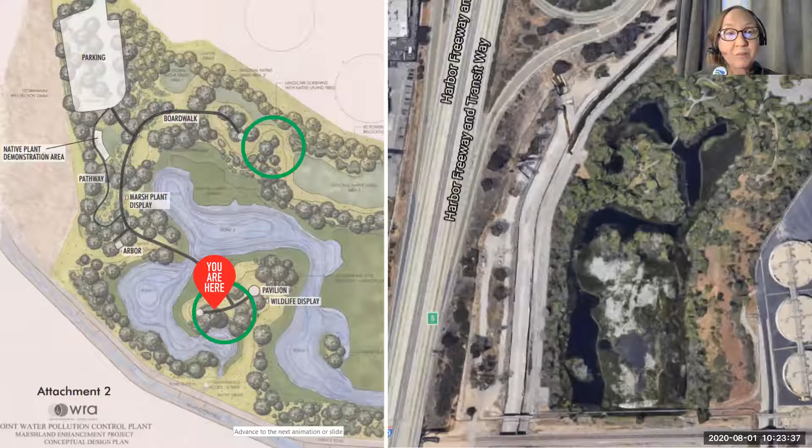As we walk, we're going to see more of that riparian habitat. Here you see some of our sycamore trees, and here some elderberry — elderberry gained some fame and notoriety because its straight wood is apparently very good for wands, as in the Harry Potter series. And here you see some younger sycamores.

We did have some Phytophthora dieback, a fungus that, as a result of the drought, infected some of our sycamores, so we had to remove those. But it's exciting to see that some of the younger species are coming in.

Wetlands are sometimes called the kidneys of the landscape, because as the water comes onto them, it slows down. On my next slide, an overview will show how the water, once it's pulled from the drain, flows gently across the land and is filtered, which helps clean that stormwater before it joins the environment.

This graphic does a really nice job — I'll spend a little time showing you how the water flows across this 17-acre site. Here's where we were standing, looking out at that pump station from the Wilmington Drain. We pull water from the Wilmington Drain, and it goes through those different habitat zones, the five areas we talked about, providing habitat and filtering out pollutants such as sediments, before being returned to the environment. So you can see how the water flows through the marshland.